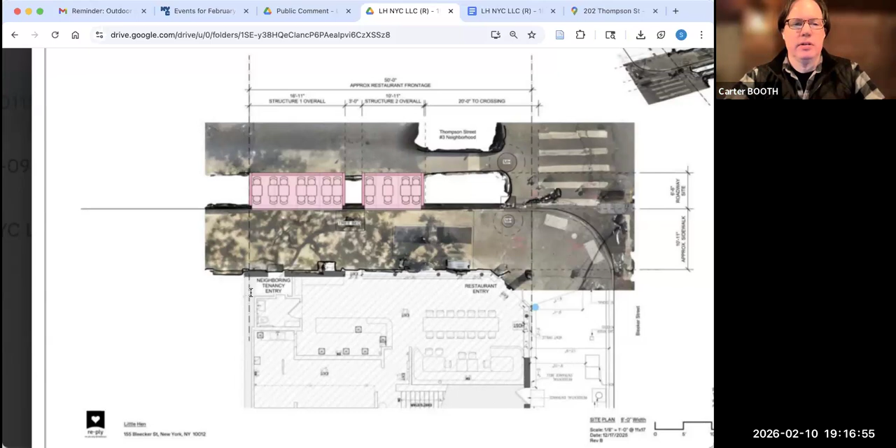Yeah, I guess that's where it says 'neighboring tenancy entry' -- so that's a shared entry, it's communal, not exclusive. Right, but again, I don't have any knowledge that they use it. Right, but presumably they would need it for emergency egress, etc., so it's not exclusively yours. Yeah, that I have to check, of course.

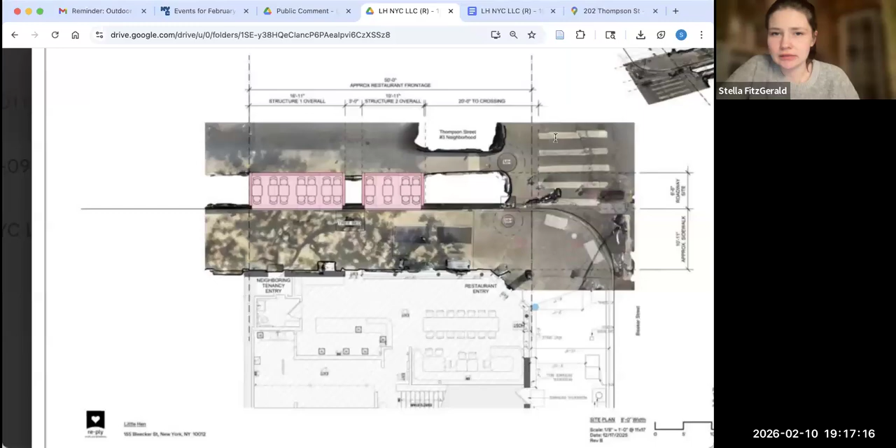Do you know, Stella, what the resulting roadway width here is? Yes. And that brings up another good point: this roadway cafe is also proposed to be right across from the Red Lion's Roadway Cafe.

And because this is a narrow street where we would need an FDNY waiver, in what I believe are the only guidelines we have from FDNY from 2024, potentially at this point, maybe it was 2025, I forget the years. But FDNY said that if two roadway cafes are across the street from each other, they would have to be offset by at least 15 feet. And in this case, that would not be met because they're back to back.

So I'm not sure if DOT considered that, or if FDNY is considering that. Presumably they would be. But to answer your question, Carter, the travel lane, considering both the Red Lion and Little Hen cafes, would be 13 feet, 1 inch.

Yeah, I just raised that because, as most people know, this was the site of a huge 5-alarm fire, and none of the fire trucks could access the location because the streets were all narrow. There's just no room to maneuver. So in a huge response like that, there's just no extra room. And this area, all the north-south streets are that narrow.

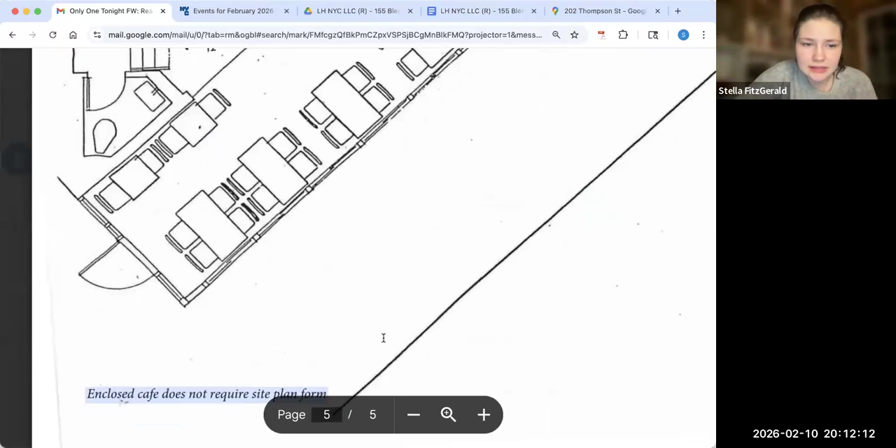It says here, enclosed cafe does not require site plan form. But I thought these were going to have a separate application that came out. I'm just talking out loud. I think the issue is that they're built, and we do have all of them from our board. We have the built conditions because they would have supplied those materials in the past.

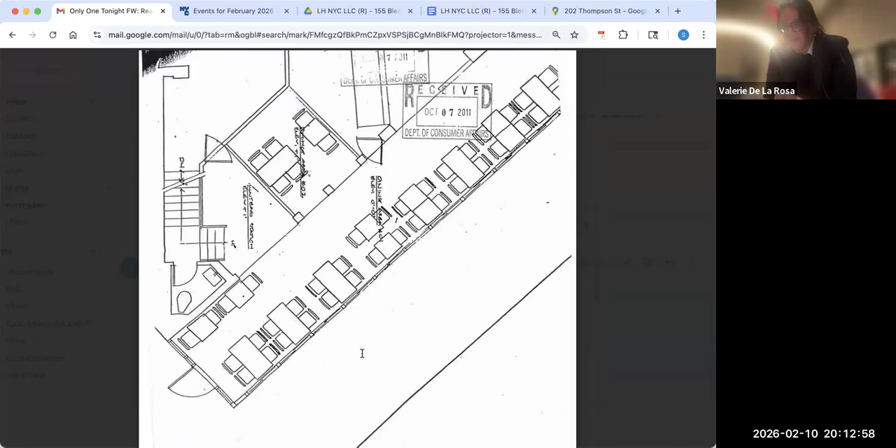You can see right there, the DCA is stamped. I just thought that for some reason that DOT, for like Dining Out NYC, had the enclosed. Am I imagining things? I swear.

Well, there was a separate application that they said they would have, and that's what this is, right? That's what this referral is. That is the application. Oh okay, and then I guess these just look the same to me, pre-existing, because they're pre-existing, you just have the old plans.

The only thing that's going to come up for us as a board is that the evolution of all these enclosed sidewalk cafes includes removal of a lot of the walls that has happened over time, when these were supposed to be standalone and that can be removed. And this one, I think also, if it's the one I'm thinking of, which it looks like it, I think a lot of the walls in here are removed. But if you scroll down to the plans, you'll see there's a doorway in there, which I don't think is, but I could be wrong. I think it's this one, but

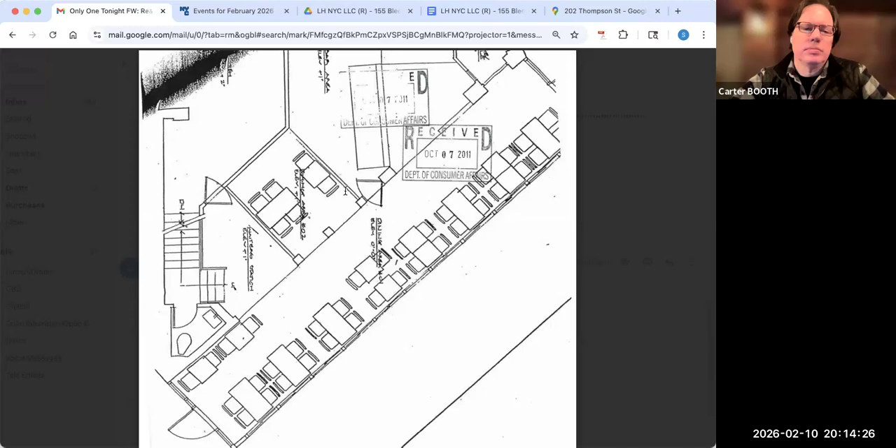I guess I was just expecting it to have like a different cover and say enclosed sidewalk. That's what I was envisioning. Well, what does it say at the top? It doesn't say - it just looks like a regular old form here. I mean, I thought on the form it would say enclosed sidewalk cafe setup.

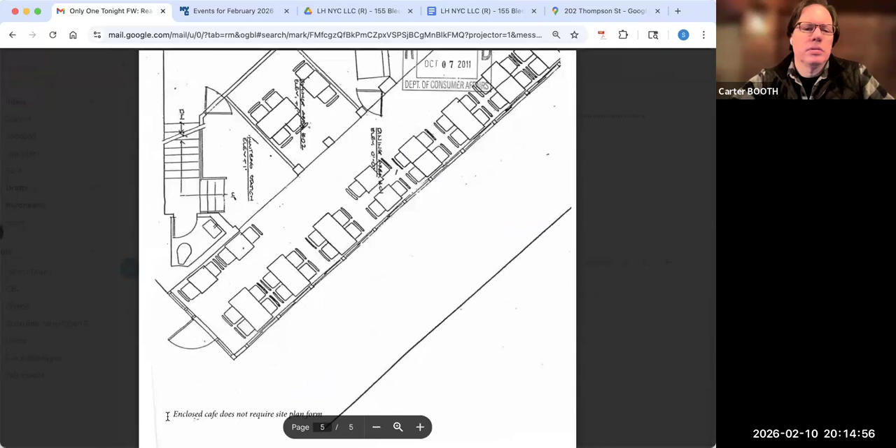Maybe one of the requests is that we ask them to clearly denote it on the application, right? Where should it say it's enclosed on our records? On the plan, only here: 'enclosed cafe does not require site plan form.' That's the only place. It doesn't say it up in that top right where it says sidewalk cafe, no.

It seems like it would make sense to add a little more clarity. That's why I talked about it in that roundabout way, looking at the photograph - I hadn't gone to the plan yet. So I just assumed you had pulled it up, or Carter had pulled it up.

What happens if you scroll down? Are there any others? If you keep going down, it's not redacted though, so it doesn't matter about the clear path or what corridor. Were there any other notations in the info sheet section? Oh, there's the restaurant info sheet. I'll stop sharing so I can look at it.

The info sheet says enclosed sidewalk cafe eligibility - eligible, yes, eligibility as of 10/15/2025. Okay, it's just in the middle of it, not really bolded or anything. No, I just scrolled past it, so I missed that. Okay, all right, I guess that's what they look like.

All right, wow, groundbreaking. All right, any other new business?